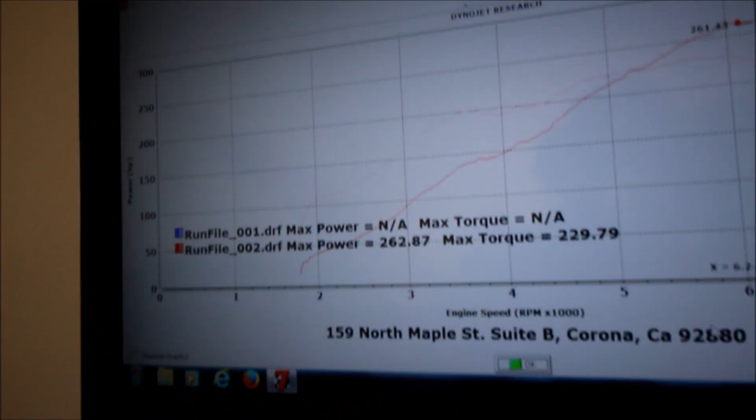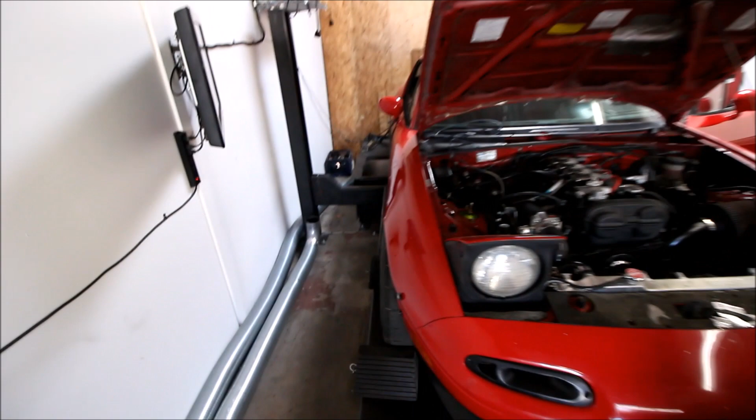Update time. I have found the courage to raiseth the boost. So I'm now at 16.5 pounds, still on 91 octane. And yeah, you remember when I said I just wanted to make 300? Honestly, I thought it would take at least 18 pounds to get there. 327 wheel horsepower, and I haven't even put the E85 in the tank yet.

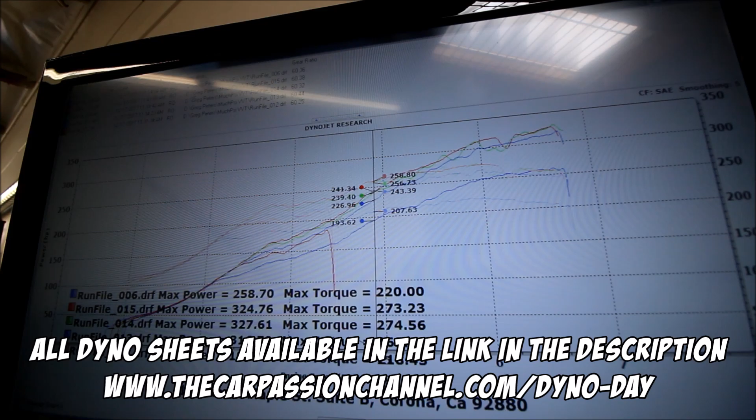And honestly, I'm good right there. That's more power than I was expecting on 91. I might back the boost down just a little bit, 15.5, 16 pounds, see if it wants a little more ignition timing. I'm gonna play with the VVT, but I feel like the 91 octane tune is shaping up nicely,

and I'm not gonna shoot for much more power because I want something that's nice and safe to daily drive on. Again, I'm gonna be on 91 most of the time. It's a daily driver, so I want a good rock solid tune that's not overkill. And then when I go racing, I'll put the ethanol in it.

So here's a little 320 plus horsepower dyno pull for you guys. And I still have the cutout closed because I'm trying to respect the neighbors, but we'll crack that thing open later.

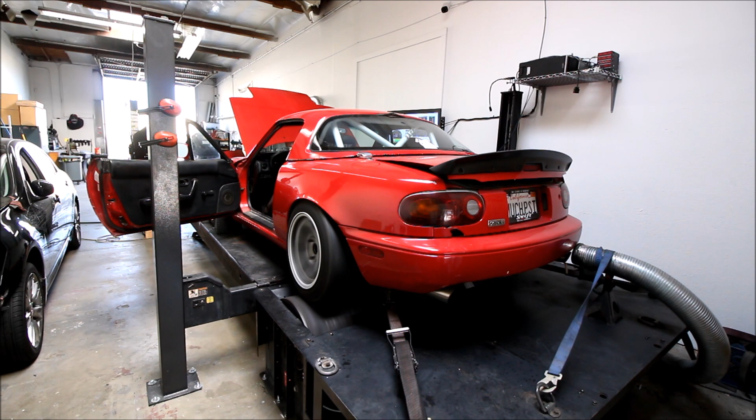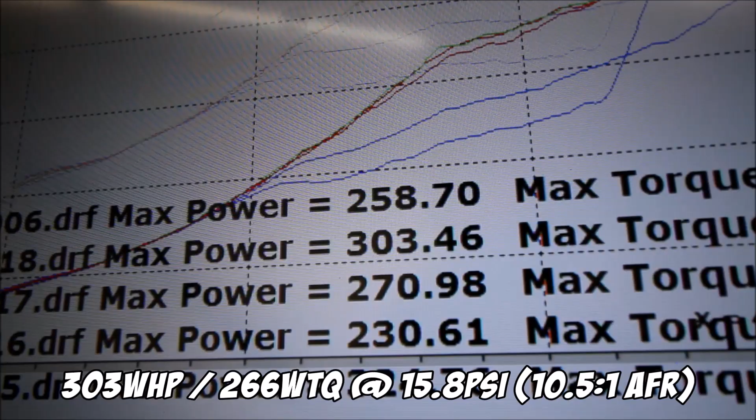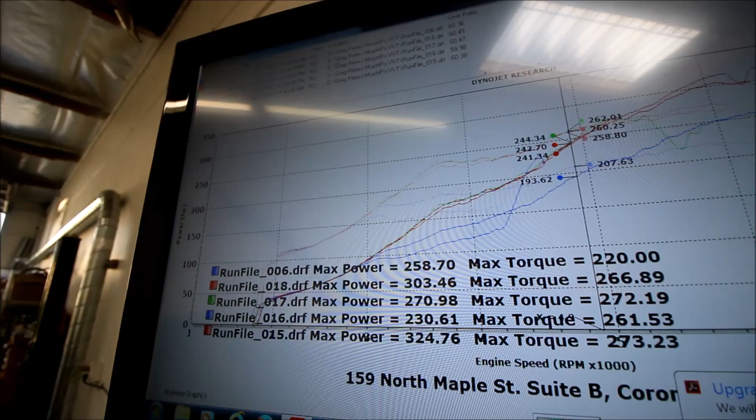Alright, so that one was 303 wheel horsepower, 266 pound-feet of torque. I did lower the boost a little bit on that one, just to see kind of what the effect would be. And it got into a different area of the map that's not quite tuned yet, so it ran really rich up top, dropping the horsepower quite a bit. But that is what I am here for. It still made over 300.

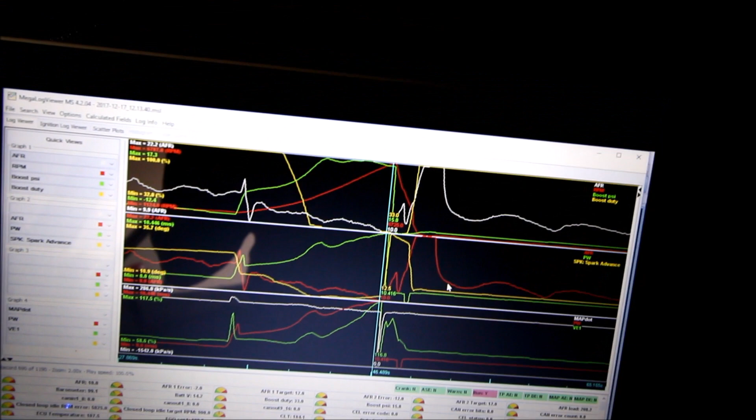So yeah, it did 327 at 17.1 pounds, and it did 303 at 15.8 pounds, but running super rich. So we got more work to do here, folks, but it's looking good.

All right, so the 91 tune is pretty much settled in. I'm gonna do one last pull now that the car has had a chance to cool off, and I'm gonna run it with the cutout open to see if it makes any more power. We'll see what she makes and then switch over to E85. Okay.

We're only on 91 still. 332 wheel horsepower, 276 pound-feet of torque at the wheels, and that's exhaust cutout open versus closed, and gains can pretty much be attributed to the car is on open loop boost control, so it's running maybe 1 pound extra right there. It's about 17.5 pounds of boost, maybe 18 at the most, but I'm gonna leave it right there. I'm good. You can see we're spooling a little bit faster with the cutout open.

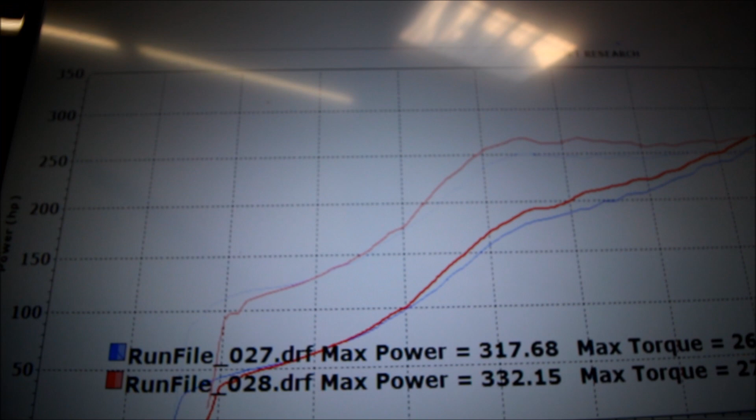That is 3,400 RPM, 250 pound-feet of torque. That's where the old 1.6 made 200 pound-feet of torque. So we're 50 pound-feet of torque higher at 3,400 RPM. This thing is turning out awesome.

Let's switch fuels. All right, so to get all the 91 out of the tank, I just hooked the feed line of the chassis up to a long hose into my tank, and I'm gonna use Megasquirt to turn the fuel pump on until it's all drained.

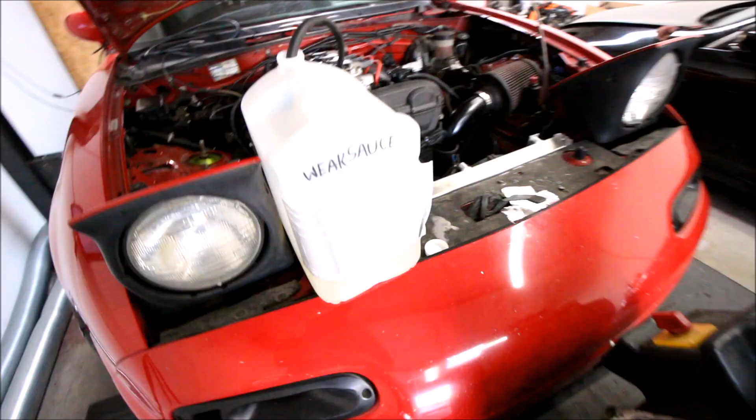I didn't think it would happen this fast. We set everything up for flex fuel, did a pull on E85 at 4 extra degrees of ignition timing, 1 more pound of boost. It made 368. I threw a couple more degrees of timing at it, a couple more pounds of boost. Let me just show you what we're working with right now.

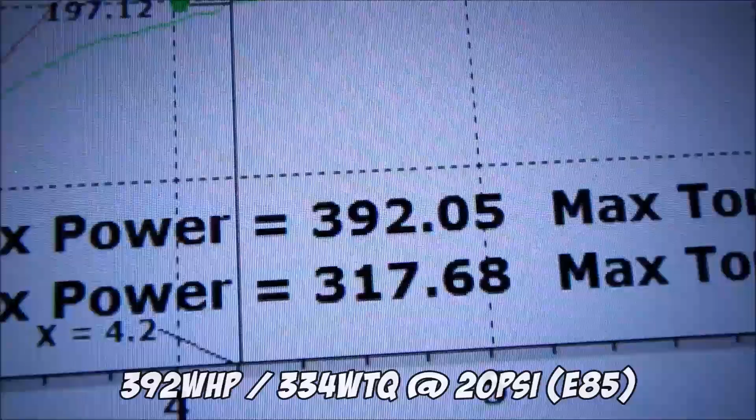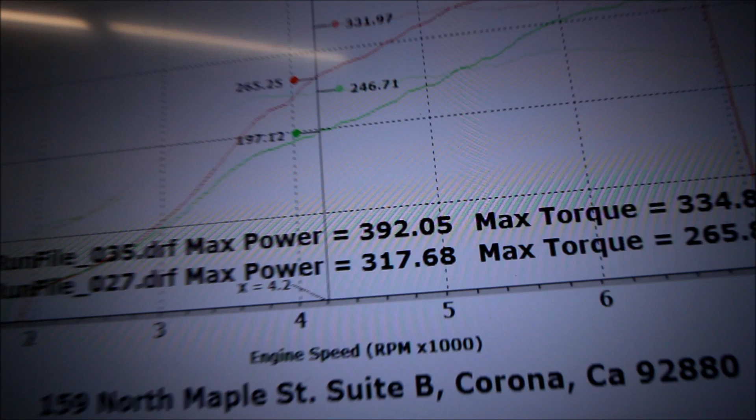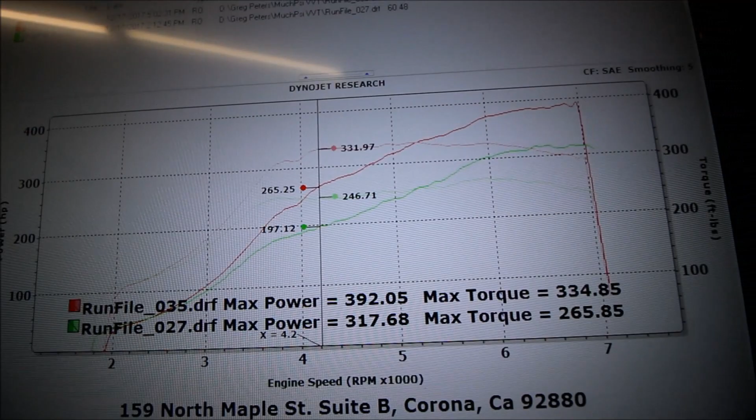That was the last pull. That's at 20 pounds of boost with pretty conservative ignition timing. 334 wheel torque, 392 wheel horsepower, more than I thought I was gonna be seeing today. That 317 is the equivalent pull on 91 with the cutout closed. The 91 pull is roughly 17 pounds of boost and much less ignition timing, and then the E85 pull is 20 pounds of boost, 392.

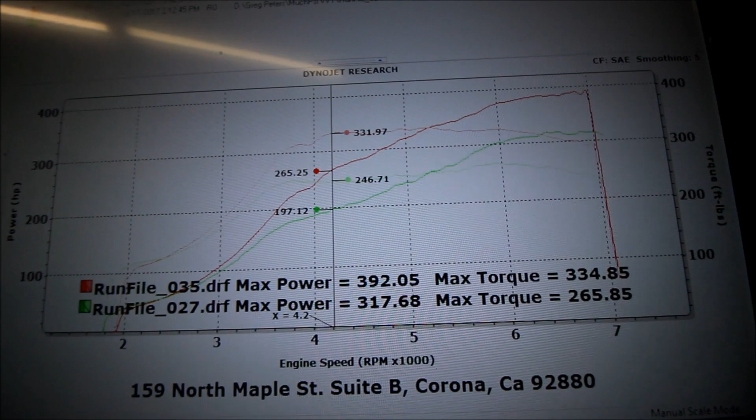So I'm going to do a pull with the cutout open after the motor cools down a little bit, and to be honest, guys, even though the boost and timing are still fairly conservative, this thing does 400. I don't really intend on pushing it any further than that. That's more horsepower than I was expecting. I don't think it's gonna need any more than that, to be honest. That is crazy to me, honestly.

I mean, I'm not gonna cry, but this is an emotional day. You guys have gone with me on this journey for the last 1.5 years, ever since I blew up the 1.6. And here we are, built 1.9. I built it with these hands. Everything's gone well so far, and I want to thank you guys for all the support over this entire series. This is the 45th video in the series. As far as the numbered episodes, I think I'm going to call it on this one. Number 45 is going to be the final Rebirth episode because it's reborn.

Now, I don't want you to get any misconceptions like I did with Broken Boosted where I sold the car. This is my car. This is my Miata. I'm in it to win it with this car. It's my daily driver. It is the kill machine. Now, why don't we just all enjoy a nice little straight pipe E85, 20 pounds of boost Miata dyno pull right now.

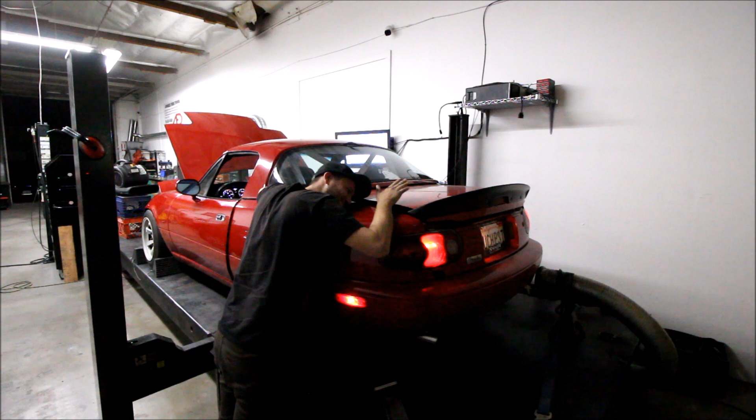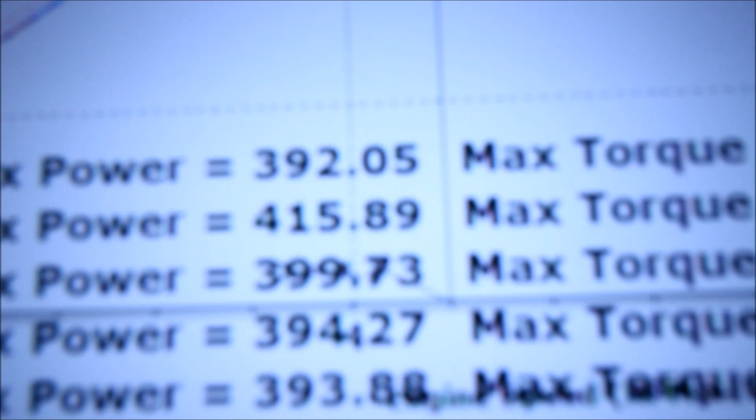Added another pound of boost and a little bit of timing, and 415. Oh my god. It did 399.7, and I was like, okay, we got to do it. What do I need? Another half a pound of boost, so I bumped it up another pound, only in the high RPM. Toby convinced me to throw another 2 degrees of timing at it against my better judgment, and 415 horsepower.

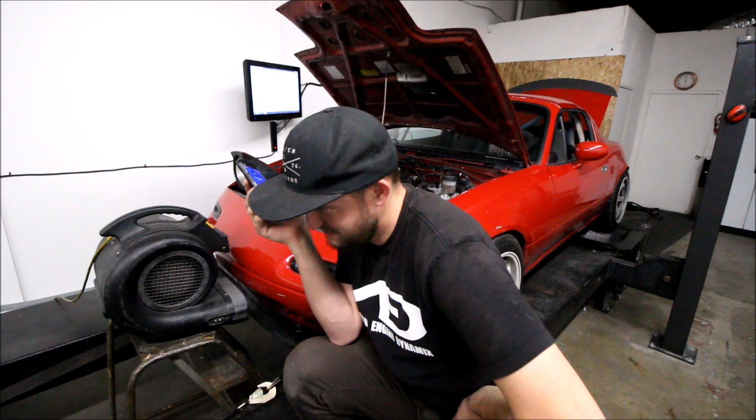Man, how many pulls have you done? This was my 40th pull. You've done 40. Dude, we're like... Any guesses? 376. You made 415 horsepower. No way. That's awesome.

The funny thing is, the car doesn't feel any different when you're just cruising. Come with me on this first drive. I'm not gonna go crazy with it, but I at least gotta enjoy this power for a pull before I take it home. Forget the first 3 gears, brother. You're not using them. That's something else. I can't even believe that. That's unsafe.